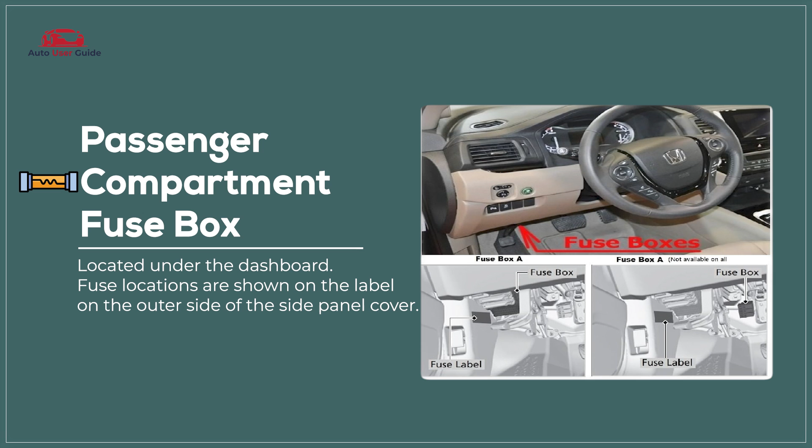Passenger compartment fuse box. The passenger compartment fuse box in the 2016 to 2018 Honda Pilot manages and protects interior electrical systems such as power windows, infotainment, and climate control. It ensures consistent power distribution and reliable operation of cabin features.

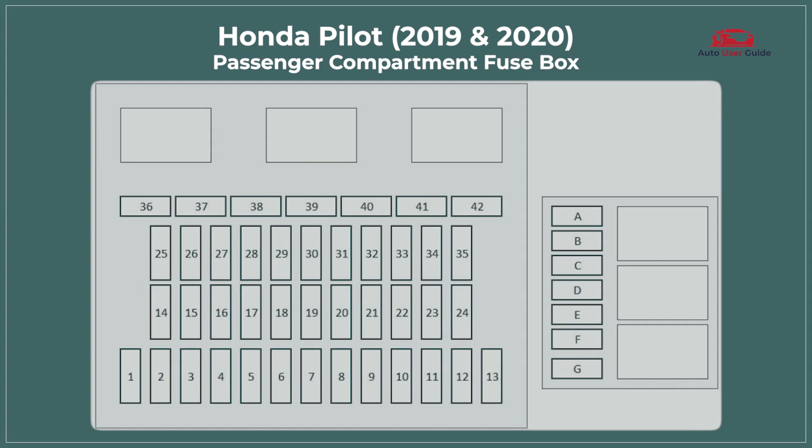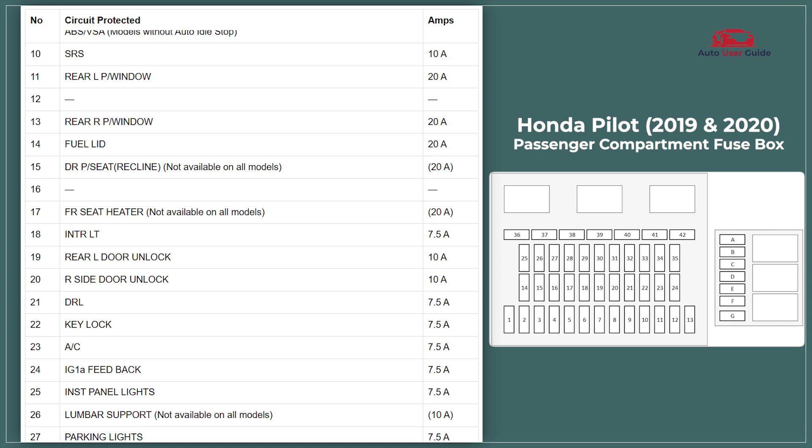The passenger compartment fuse box in the 2019 and 2020 Honda Pilot manages and protects interior electrical systems such as power windows, infotainment, and climate control. It ensures consistent power distribution and reliable operation of cabin features.

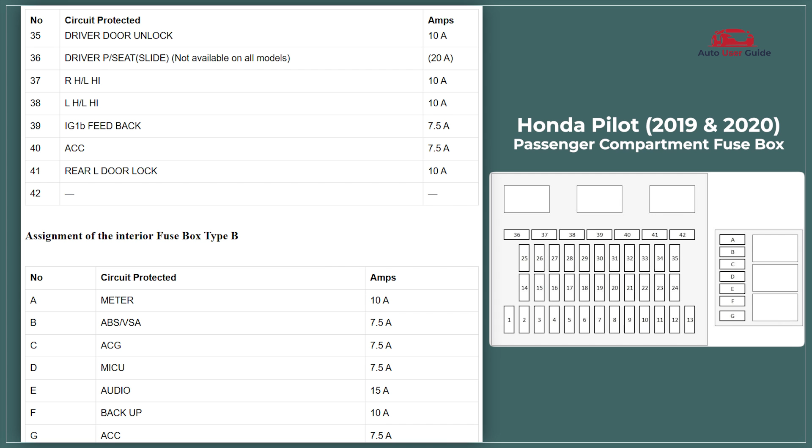The passenger compartment fuse box in the 2021 and 2022 Honda Pilot manages and protects interior electrical systems such as power windows, infotainment, and climate control. It ensures consistent power distribution and reliable operation of cabin features.

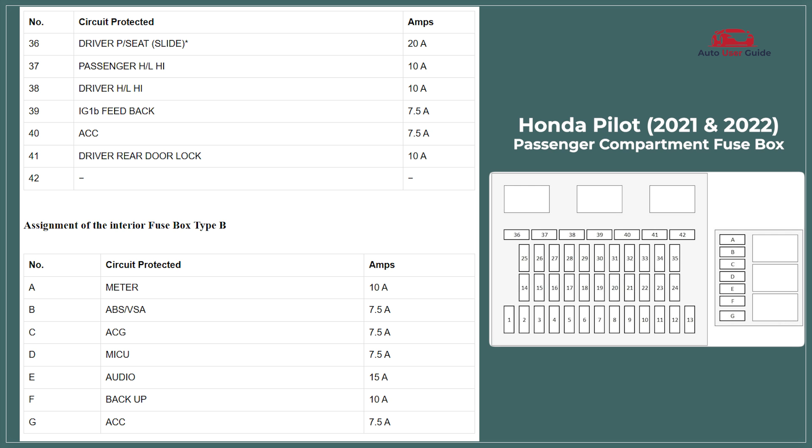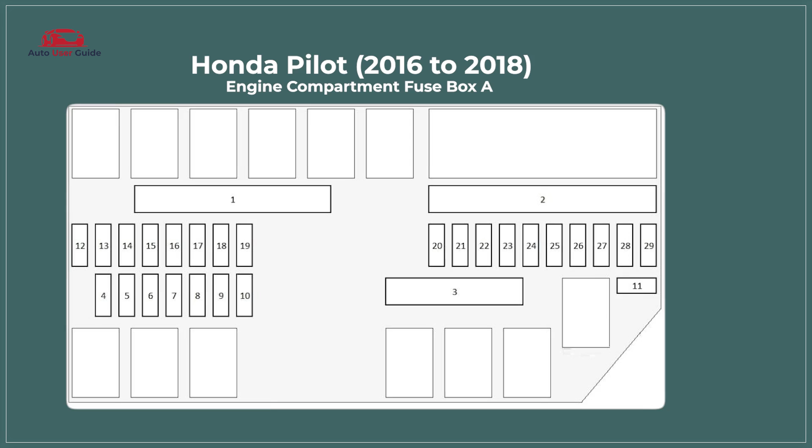Engine compartment fuse box. The engine compartment fuse boxes A and B in the 2016 to 2018 Honda Pilot protect vital engine and electrical systems, including ignition, lighting, and cooling components. They ensure efficient power flow and reliable performance of essential vehicle functions.

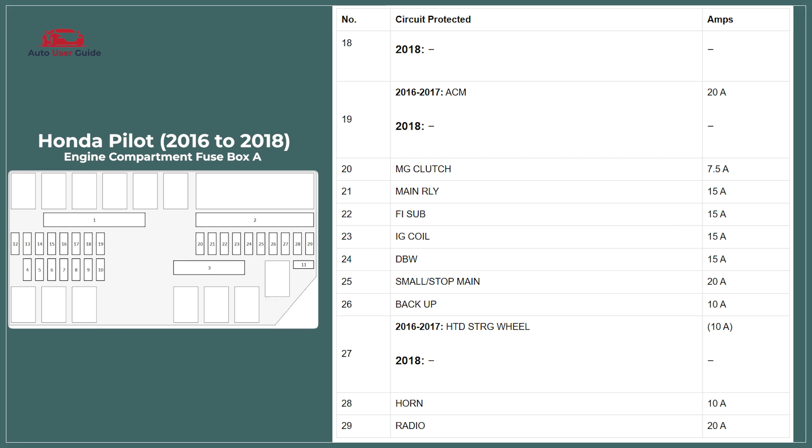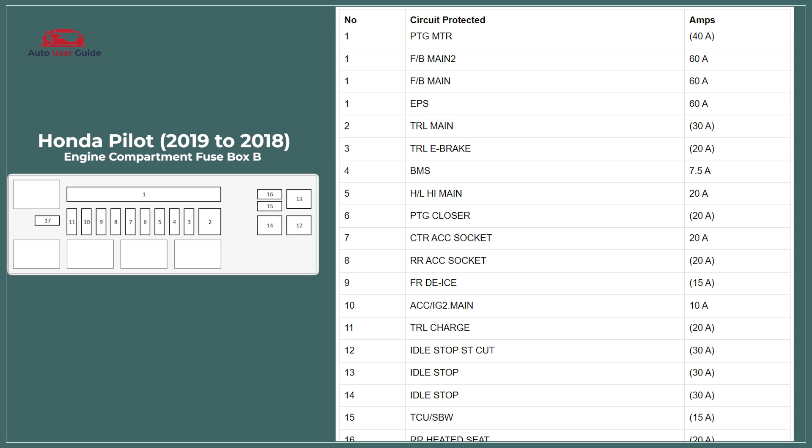The engine compartment fuse boxes A and B in the 2019 and 2020 Honda Pilot protect vital engine and electrical systems, including ignition, lighting, and cooling components. They ensure efficient power flow and reliable performance of essential vehicle functions.

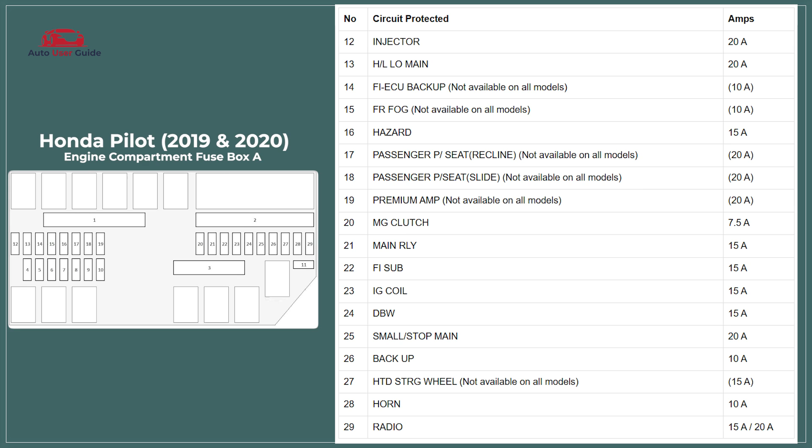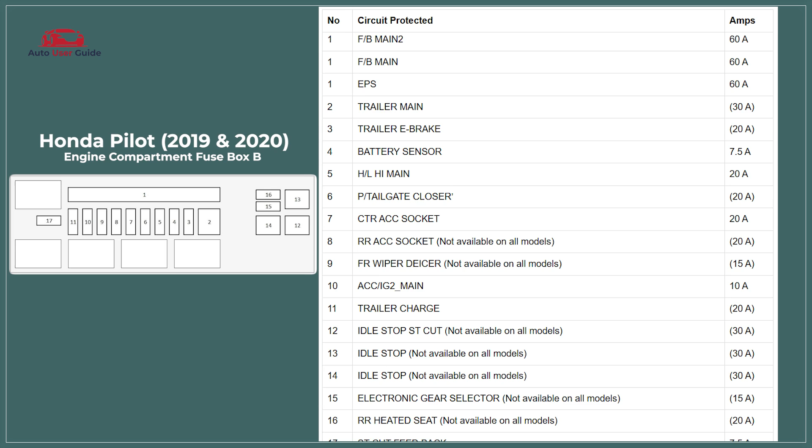The engine compartment fuse boxes A and B in the 2021 and 2022 Honda Pilot protect vital engine and electrical systems, including ignition, lighting, and cooling components. They ensure efficient power flow and reliable performance of essential vehicle functions.

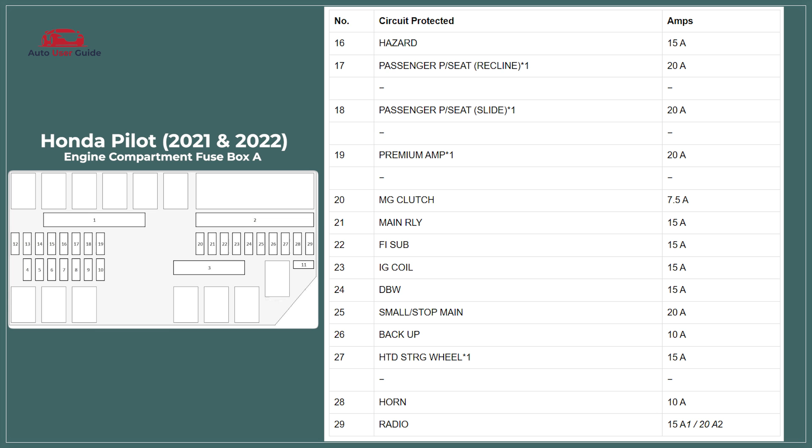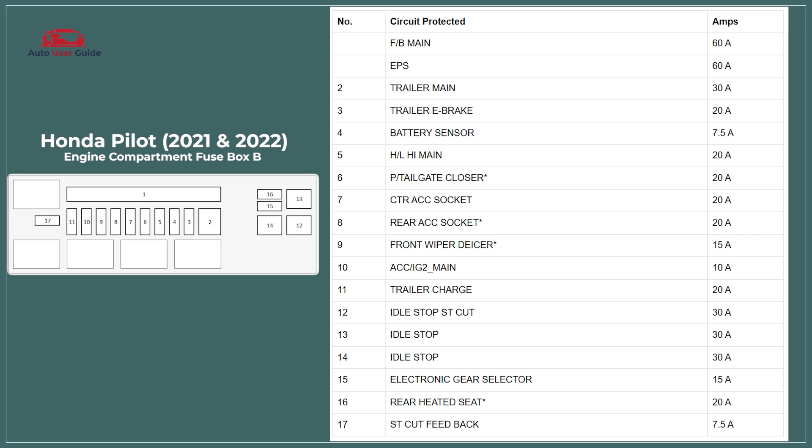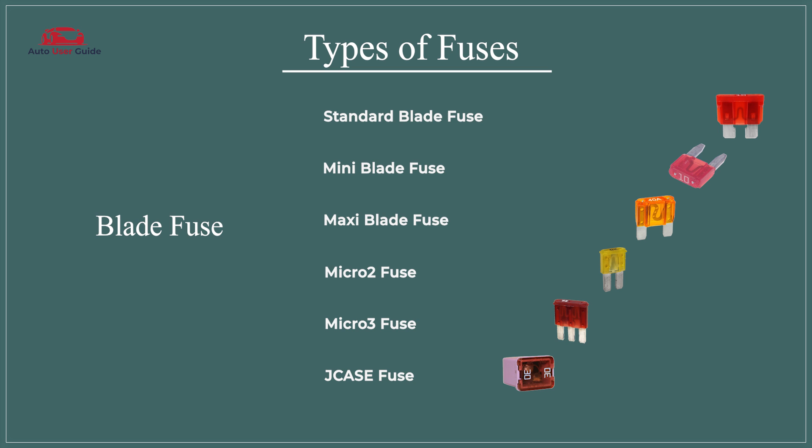Types of fuses: blade fuse, standard blade fuse, mini blade fuse, maxi blade fuse, micro 2 fuse, micro 3 fuse, J-case fuse. Glass tube fuse, AGC fuse, SFE fuse. Ceramic fuse, Bosch fuse, DIN fuse. PAL fuse, low profile PAL fuse, standard PAL fuse. Link fuse, mega fuse, high amperage link fuse.

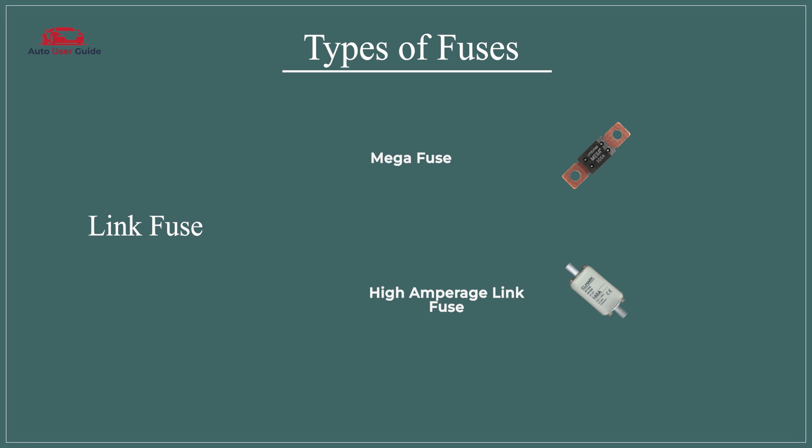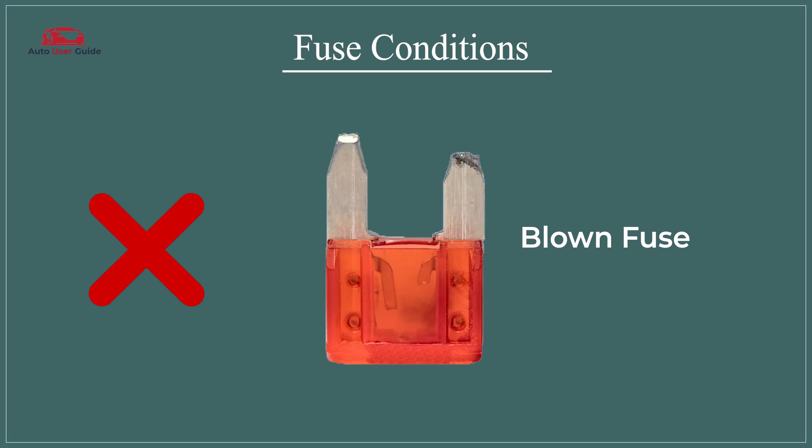Fuse conditions. Blown fuse: a blown fuse means it's no longer functioning and needs replacement, while a perfect fuse is in good working condition and performing as expected.

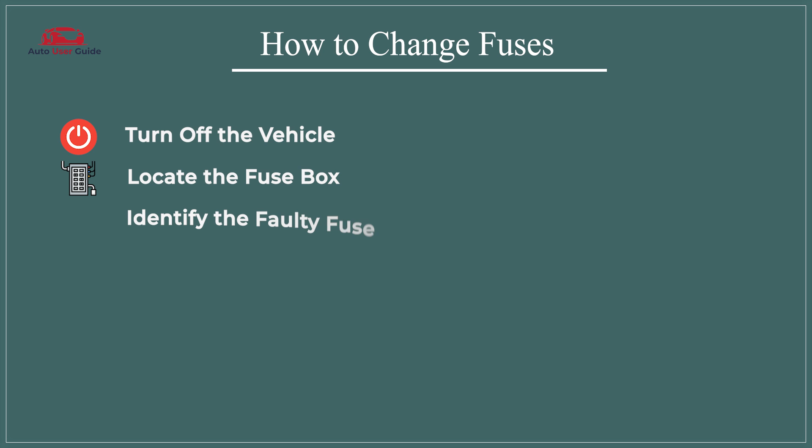How to change fuses: turn off the vehicle, locate the fuse box, identify the faulty fuse, remove the faulty fuse, inspect and obtain a replacement, install the new fuse, test the replacement.